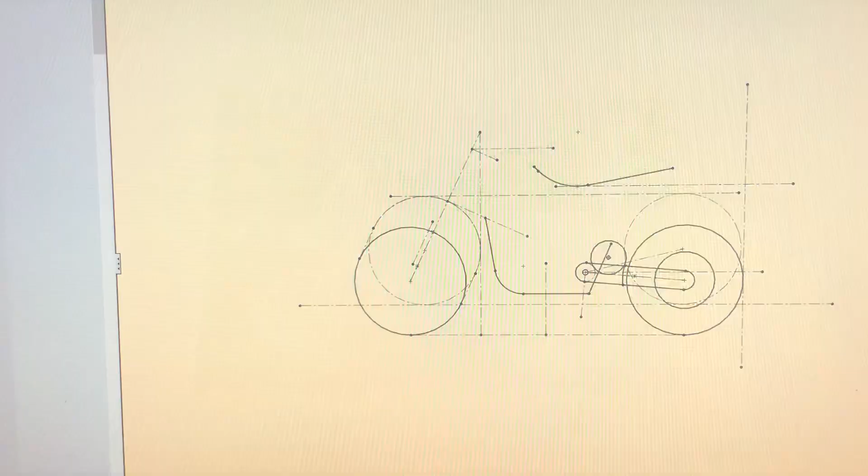So I started by drawing a life-size, 1:1 scale figure on the notepad, and by placing the figure on the motorcycle, it gave me an idea of how big it should be. So from there, I drew a sketch, inputting the dimensions.

First thing first, size of the wheel. And then from the drawing, the wheelbase. I like to give round numbers so it's not a wacky figure. So this is in inches, right?

And then the inseam, so the height when the figure sits, like the lowest part of the seat, and then a curvature. So this is the seat. So this line and this segment here, this arc, that's the seat.

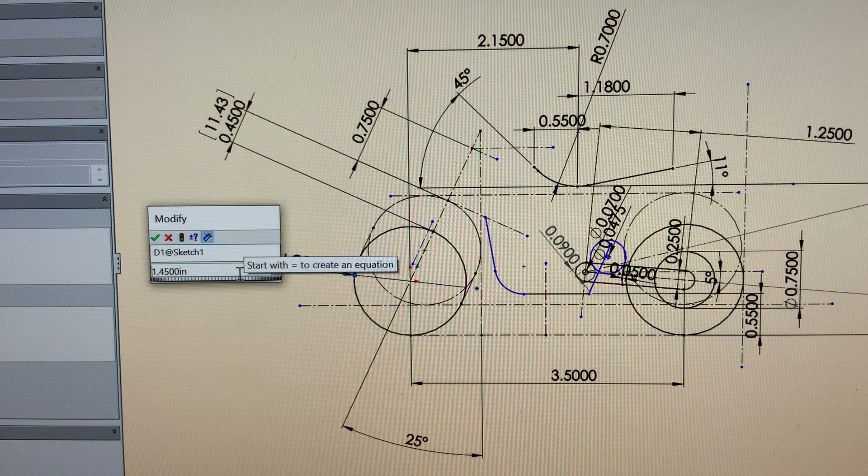And then each wheel, once I drew them, I know the size and I play around, are they going to be bigger, smaller? And then the suspension, how much travel do I give it? In real life, they have 11, 12 inches of suspension. You scale it down by 18 or by 20, depending on what you think your scale is.

Here in this case, you say, okay, 11 millimeters, that's a lot, that's plenty. And this gives me the fairing, how high the front wheel comes in. This is where the fairing is going to be. When the suspension bottoms out at the forks, everything has to be there.

And then a steering head. If the steering head is too shallow, it's not strong enough. So the longer the steering head tube, the stronger it is. So here I give a distance, and we know the bar is going to be on top of it.

And this visually gives me a good reference. You see that the top of the steering head is nicely above the seat, so we know the bar is going to be there. It gives us very good dirt bike proportions.

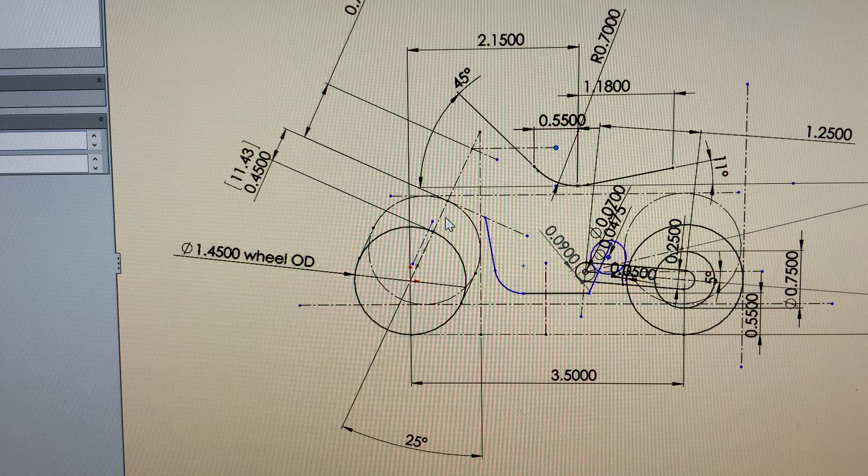Then we look at the front, the bottom tubes, where the engine cradle is. Look at the ground clearance and the clearance from the front wheel when it's fully collapsed, and also the rake, like the caster angle of the motorcycle, what do we give it.

And then same with the rear. Where's the pivot of the rear suspension? Length of the swing arm, the angle, and then the arc it travels when it bottoms out. You need some room so that you can build the seat and the guard.

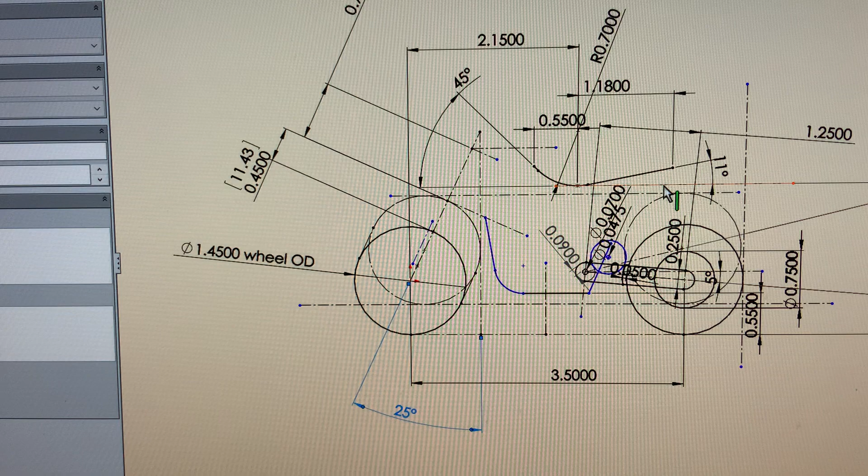So here, this is an artifact, so I was going to make the motorized version. This was a temporary spot where I was going to put a suspension with a coil spring, or linkage. I ended up not using this at all, so it's an artifact.

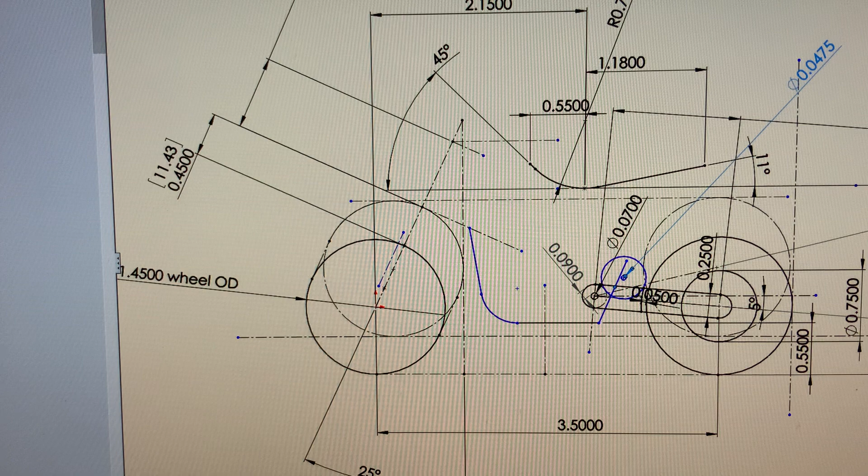Then I built the wheel. Tires, so those were measured from what the tires I had, because I didn't want to make my own tires for now. I said I'm going to use existing tires from a model.

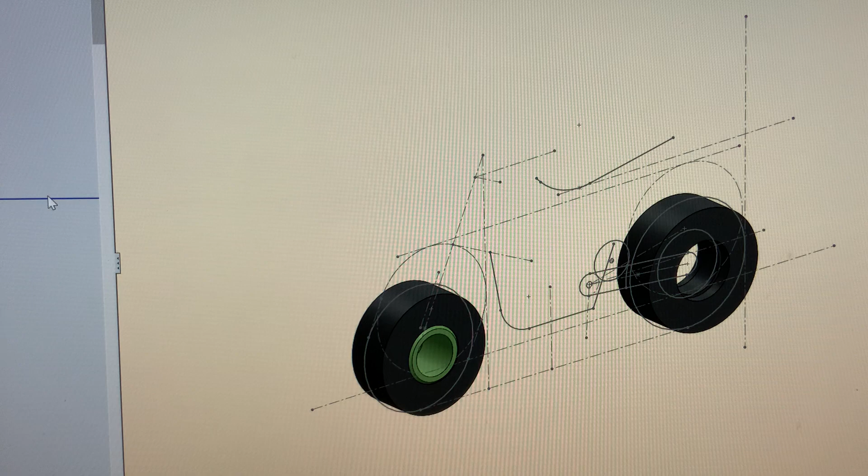Those are truck tires. So a motorcycle tire would require the tire to be round so you can steer, right? Right now it's really awkward because it's got a sharp edge. It's a square cross section.

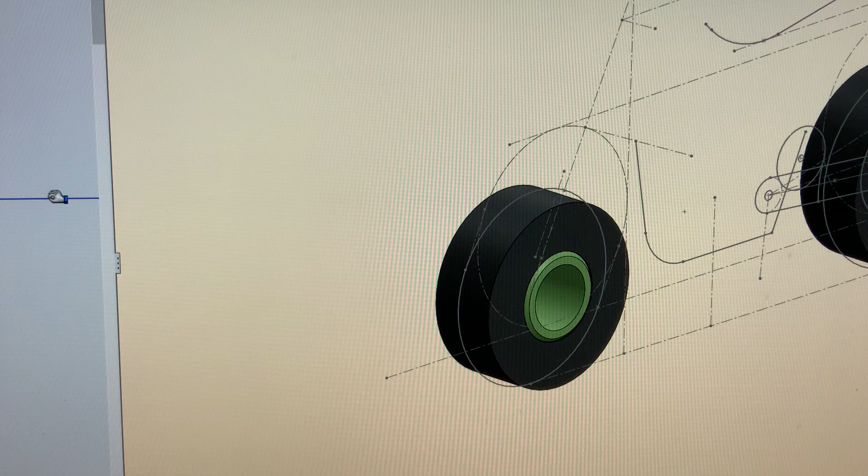But that's intended, a bit lazy, using an existing tire, but also this way the motorcycle doesn't fall off when I'm keeping it by itself. It gives a little bit of stability for just displaying it. Of course, a real bike, you have to modify it, but that's another story.

And then these are the basic bodies, the brick, base from the outline, right? So it's inspiration from the Dakar bikes from Honda's in the 80s, the NXR 750.

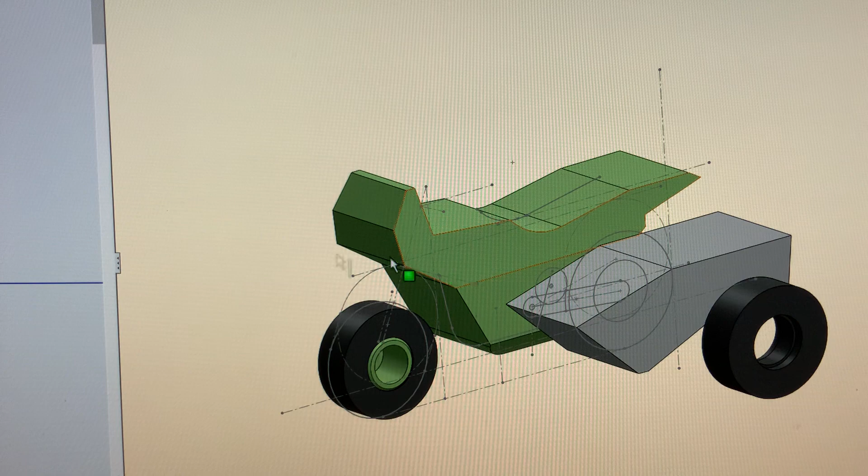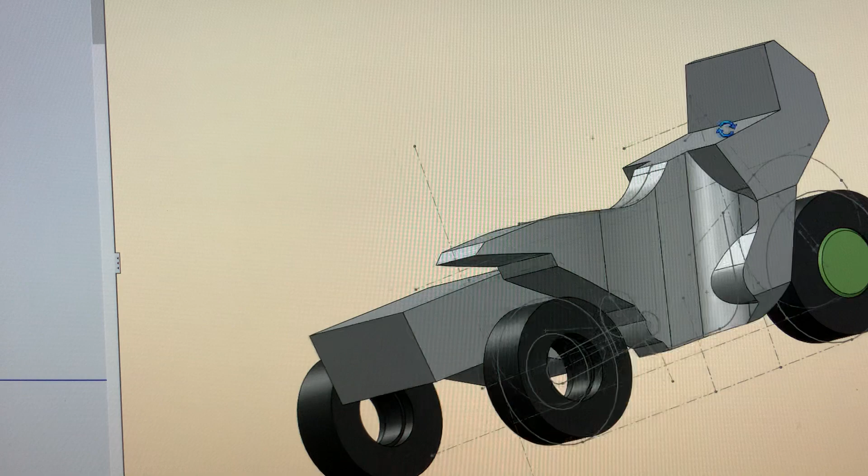And then I slim it down. I try to visualize the knees going around and the feet. The goal here is to create a body as big as possible so I can house the electronics, the motor, the batteries, all the stuff I want to put inside.

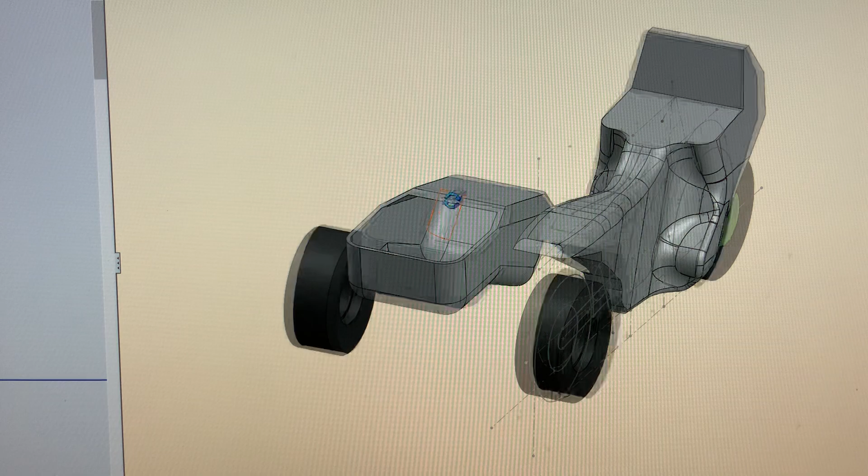So I'm going to make a shape that is as bulky as possible while being realistic, while allowing the figure to sit on. Then I play with all the fillets, round things up, round things up, round things up.

So the rear is not realistic. The rear is more like dirt bike. I didn't do the tanks and whatnot, because this is still a study, so I want to be a bit lazy and move a little faster.

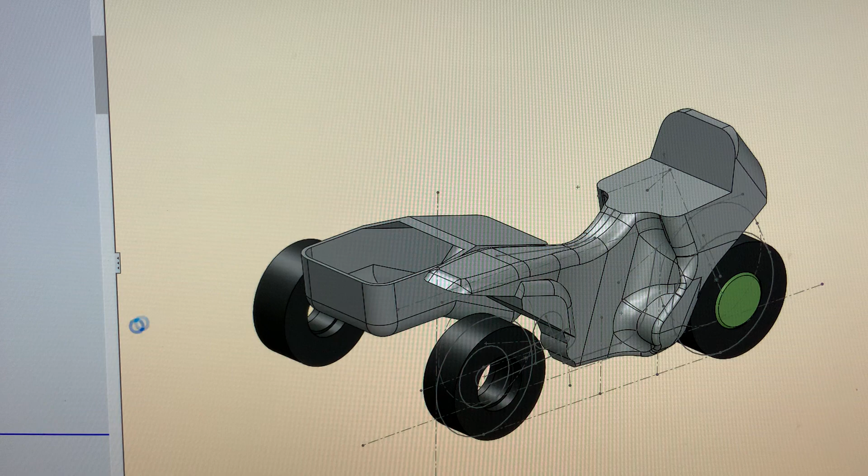Then here it starts to look decent. Like, okay, I'm gonna have the headlights there, the instrument panel in there. Okay.

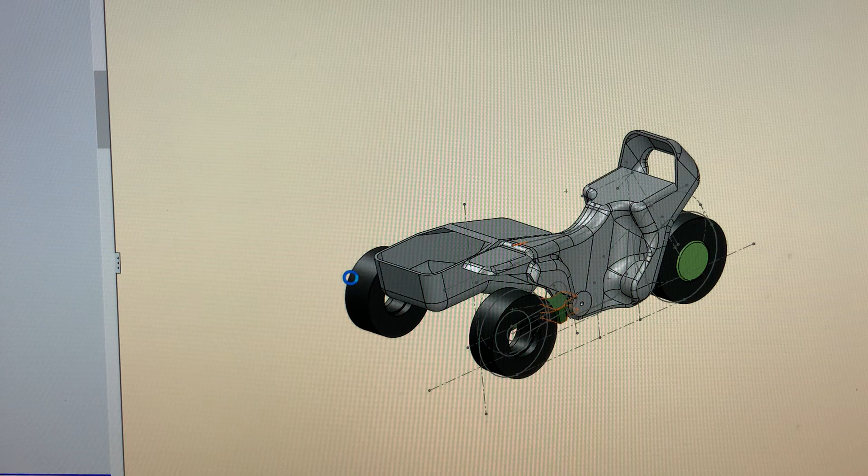Moving forward, I cut the seat. Looks good, looks realistic. Place the headlights. Okay, steering.

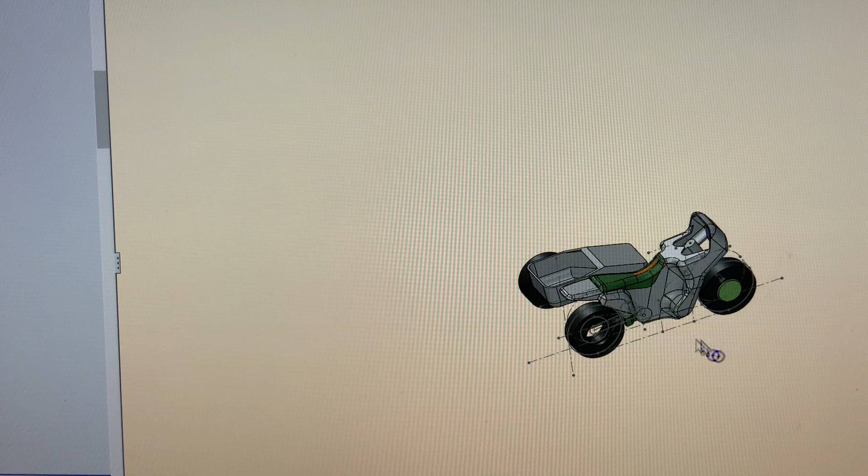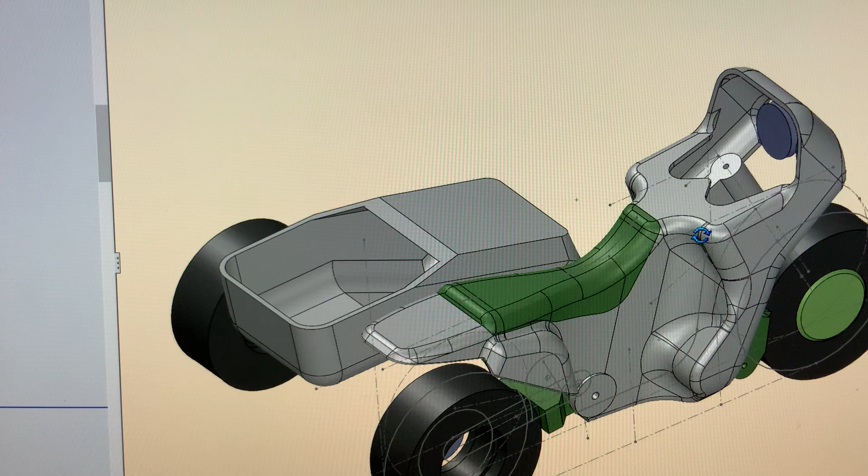The head tube has been made. And at this stage I realized, well, the real bike I would need to make a chassis and everything, and the body has to fit on the chassis. I would have to cut holes for ventilation where the radiators are, put the engine in, and cut. It's a lot of work. It can be done, but since this is a study, let's make it a monocoque, meaning the body is going to be supporting all the members, all the components, and it's just a printed prototype.

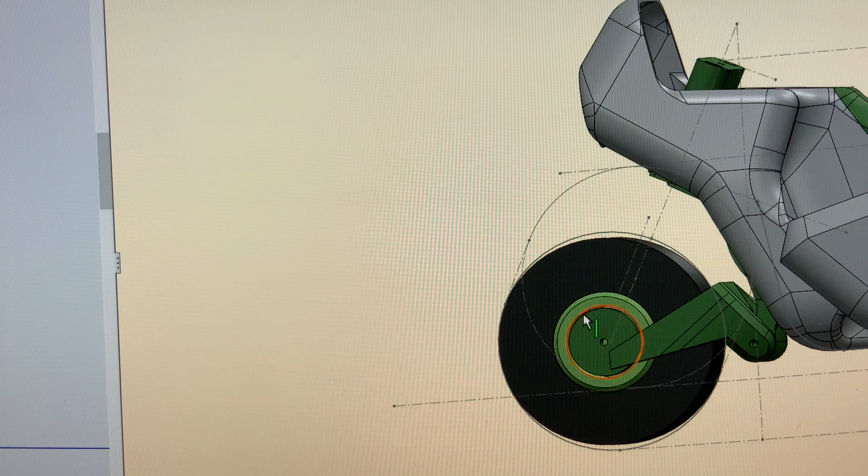So here's the forks, and this is the fork holder. I've already laid down the pivot. The pivot has to be as low as possible so that it's compliant, because if the pivot is too high, the wheel would not be able to move. So I have to lay it down and then test it.

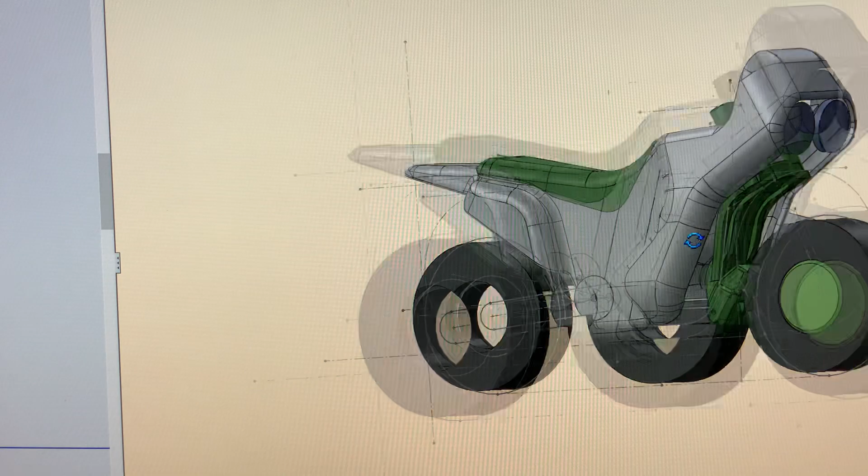So I spun the fork a few times to see the interference of the body. This gap here, in real life, is where the radiators would be. In our case, it's just to clear the fork so they can swivel without hitting anything. The only way to know that it doesn't hit anything is to turn it in the software.

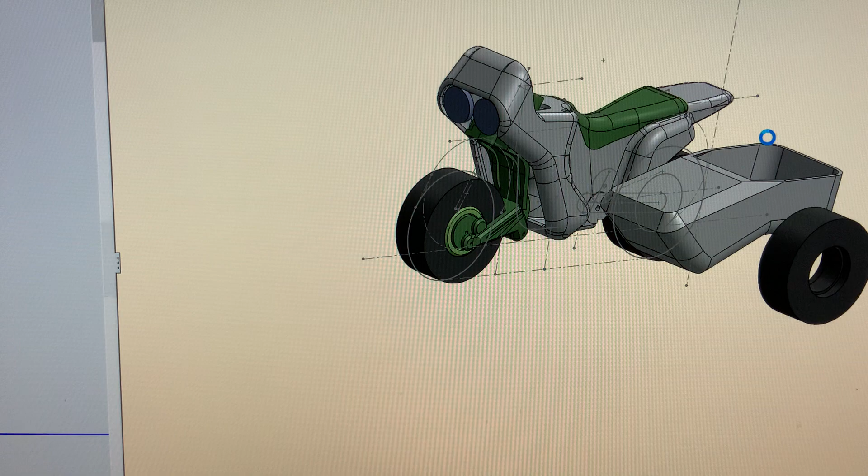I don't have it anymore, but let's see, I can keep going. That's more details - little details like the fuel caps.

These forks at this stage are very unconventional. If I wanted to at this stage, it'd be very easy to extend. Notice they were hollow, and that's because I was considering doing telescopic forks. I know it looks more conventional because this swing arm is a little odd with the blade, which has a flaw, by the way - when the suspension collapses, it does bend the other way and rubs the wheel. So, you know, it can have a few refinements. Many things can still be improved.

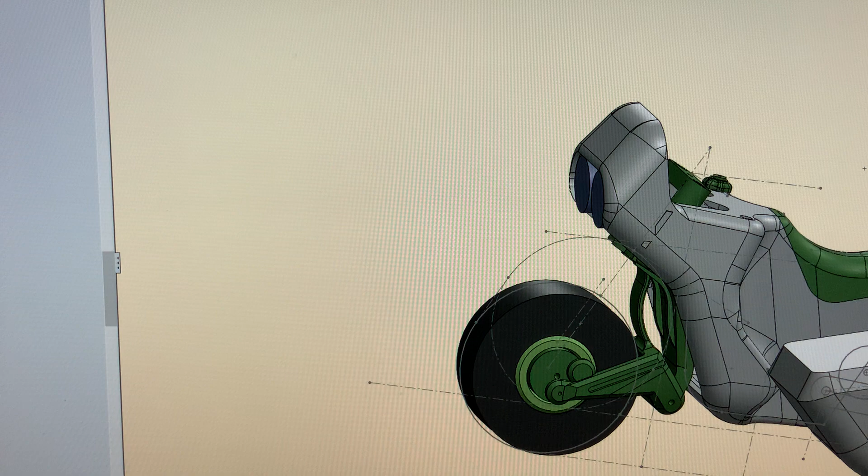Okay, and then move forward. So got the foot pegs. Let's hide the sketch so we don't see it as much. There you go.

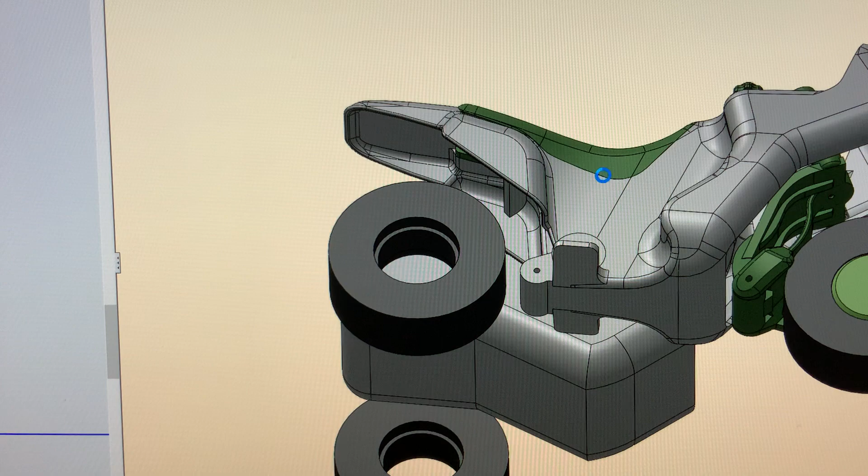So there's no screws, no glue at this stage, except maybe for the headlight dash that needs to be glued in, because I got lazy, but you can actually make everything press fit, like the seat is. So for example, let me show you here.

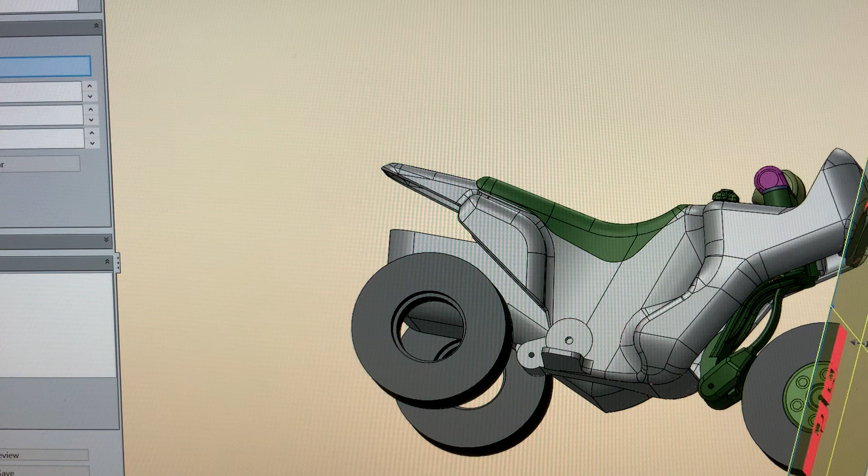So here's what's inside, right? So the seat is there. There's a rib that overlaps in there, and that little round bump here that hooks so the seat doesn't fall off.

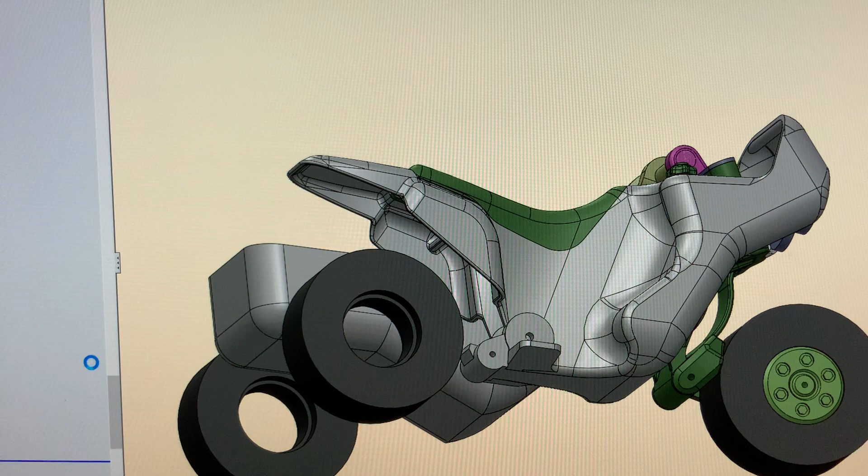So I'm not an expert. I don't do complex surfaces like real professional modelers do. I mostly carve things just like if it was wood - I extrude, I cut, I shave, I add, I round things up.

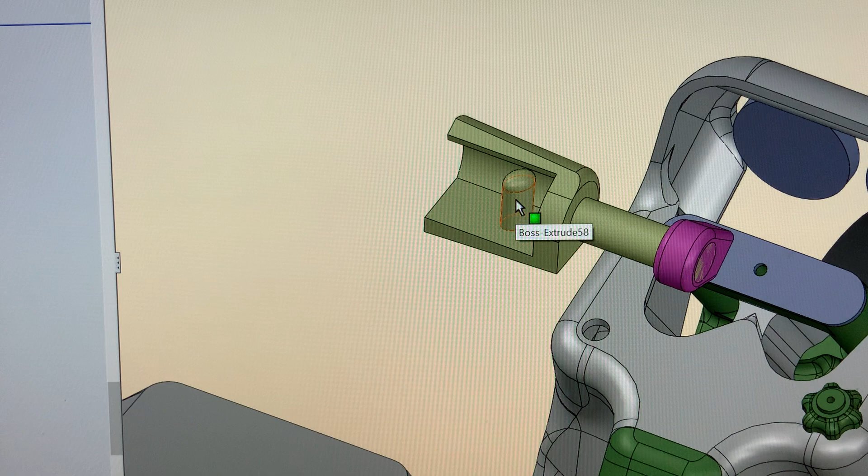Here's the handlebars design, which is - the concept is to not have the figure rotating their hands, because the wrists don't rotate. And even if they did, when someone's on a motorcycle, it's not just the wrist rotating, there's also some compound angles that a toy figure does not really have well.

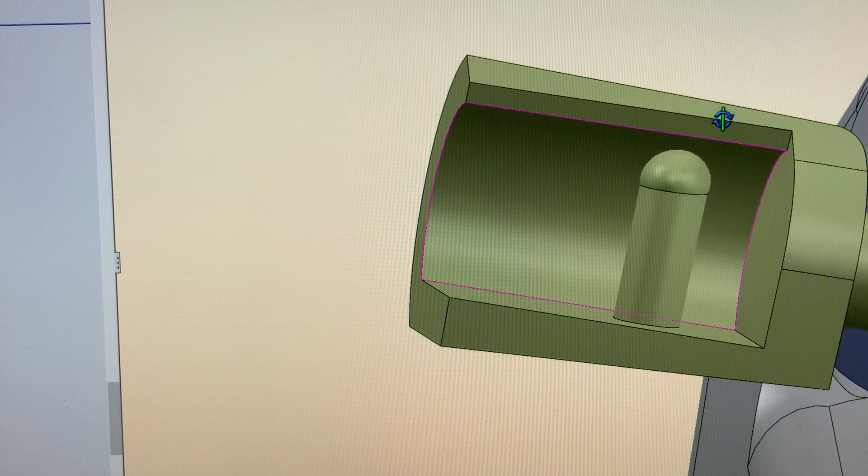So here, the idea is to have a grip that's vertical, but the thumb is going to go past over center and the fingertips going to go past. The idea is not to have this grip inside the hand at all times, but to pinch. Here, I'm going to show you - there you go. To pinch between the upper edge of the guard and the top of the grip, so that the thumb and fingertips go past and then they're held there.

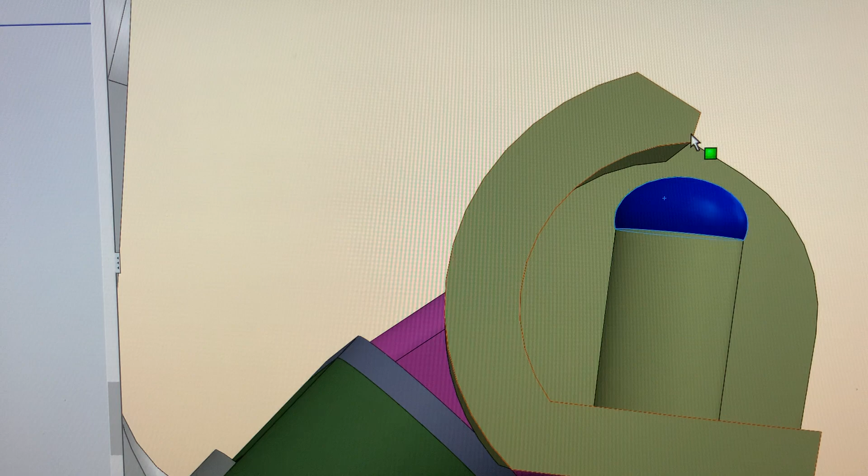Then the hand is resting on top, but does not need to be on it. And by the way, it would have to be the other hand for the left hand - this is for the left hand. So...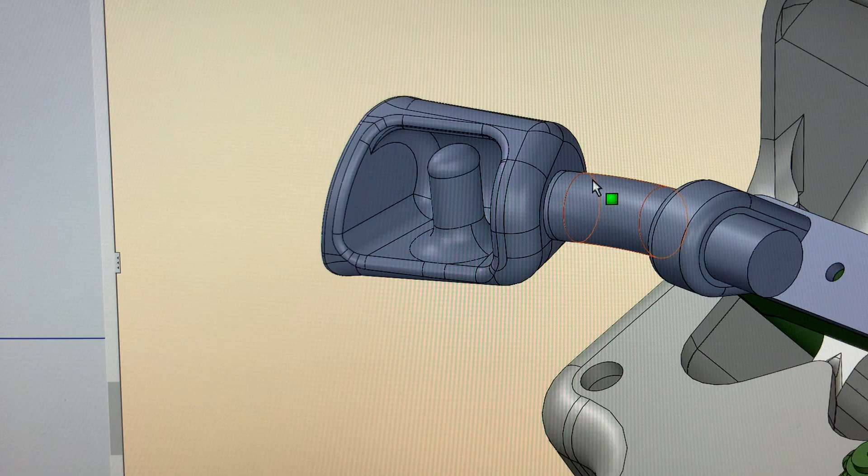I don't know where it's like - so when I make stuff, I make it and then I move it around a lot. It's not an advanced technique because people say you're supposed to know where you're going, but I don't. I'm figuring out things as I make it. So as I model it, I look at it, and it's really by eye. I'm judging and making adjustments, refining it.

So here the bars are good, I mirror them. Okay.

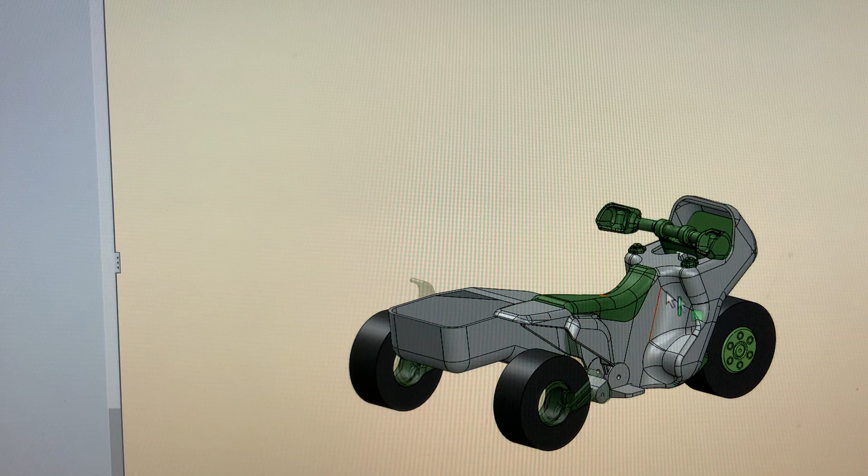And then I got lazy. I grabbed my Warthog headlights and brought them in.

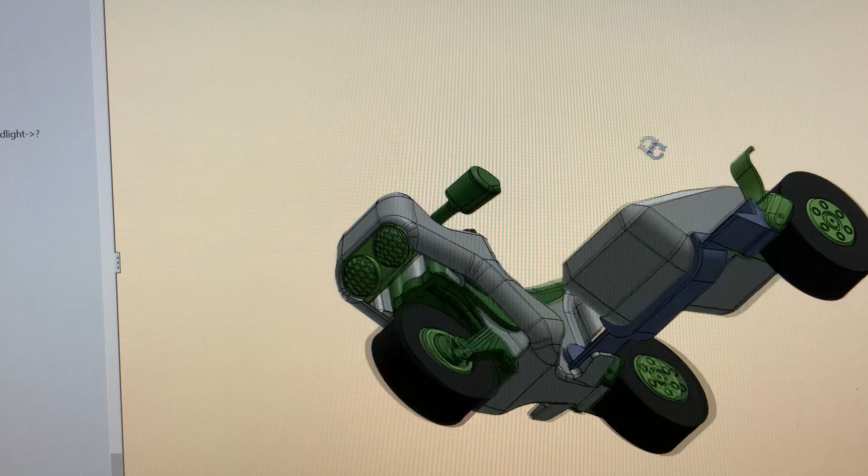So at this stage, there's a brace. I got lazy, this brace is minimal, it's ugly, but it's just to get the video down, to have something holding it. I didn't want to spend too much time because I don't think I'm that much of a fan of sidecars, so I said good enough.

And you'll notice I used the same swing arm from the rear. I had an exact copy there.

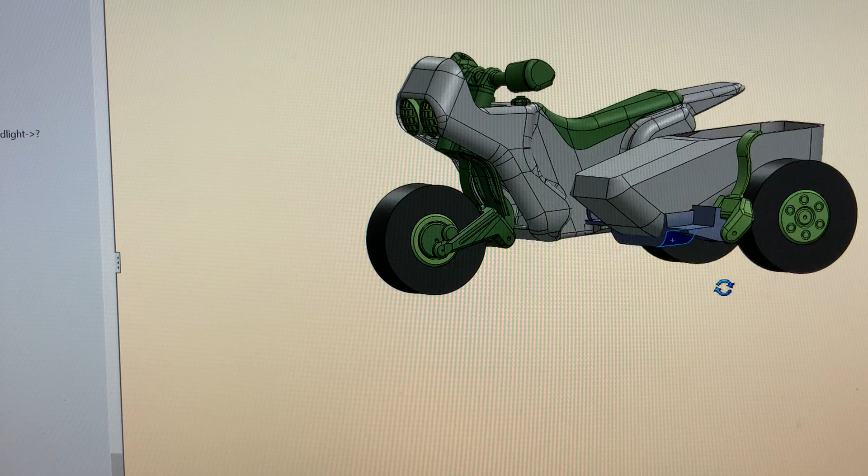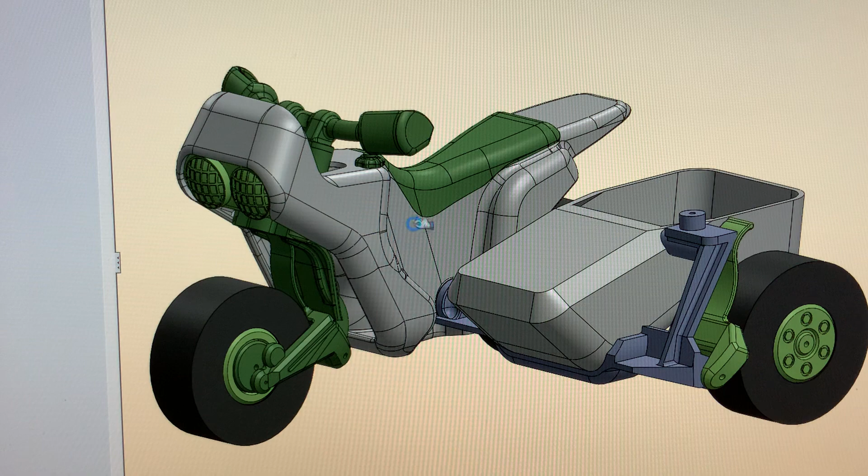And yeah, there we have it. So now let's see if I have... there you go. So here, like rotating the bar, this is rotating them a little bit, but let's see if I rotate them all the way.

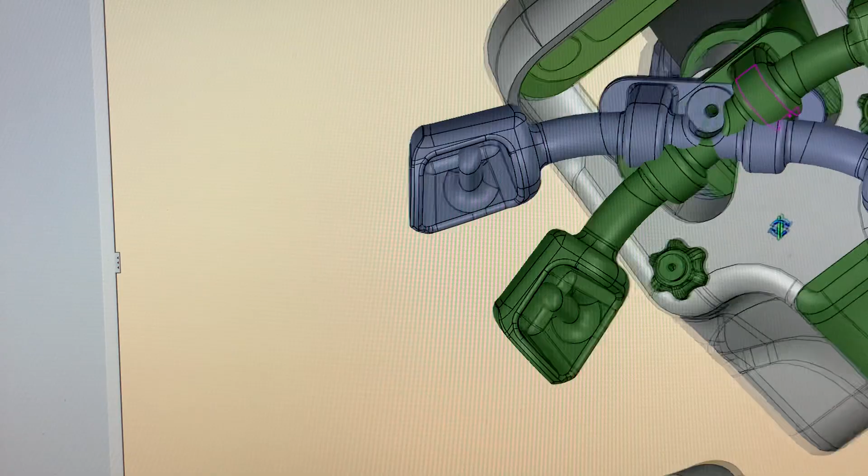There you go. So in gray you can see the bars at full lock, to see what's the interference in the chassis. Another issue I had was the interference of the gas caps, because initially they were hitting it, so I had to resculpt the body.

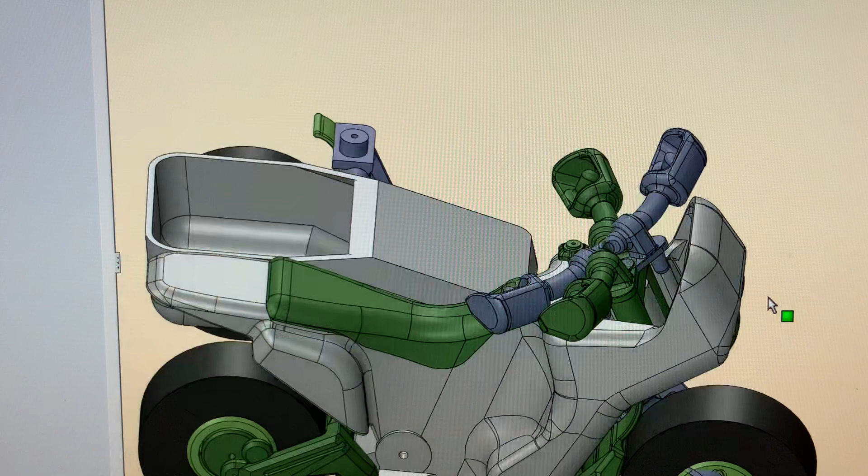The bars were in a decent position, but there was some interference. And then same with the dash here, this edge was touching. So it's like, well, form follows function, right? So the form had to be adjusted so that the bars could have a full lock.

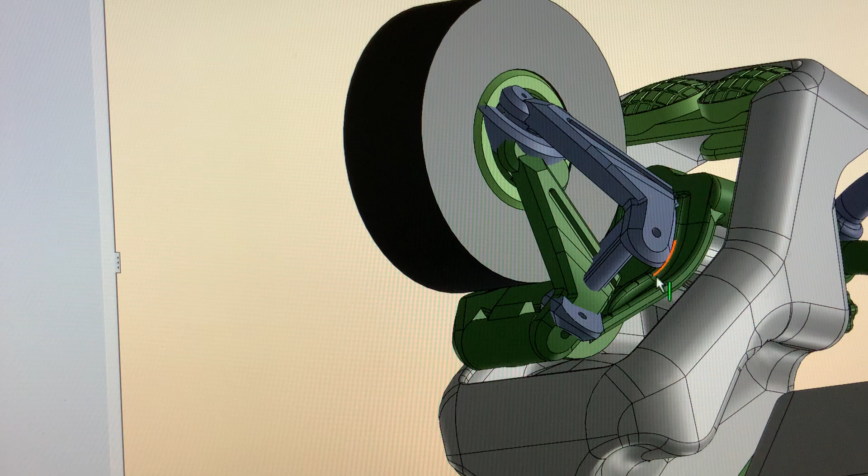And then here on the swing arm, I had to see, okay, what does it look like when it turns? Obviously it's missing a component, but I turned the entire fork to make sure there was no interference.

Now this is not critical. I mean, if we play with Joes, we might not need a full lock. We might be okay with just a little bit of wiggle.

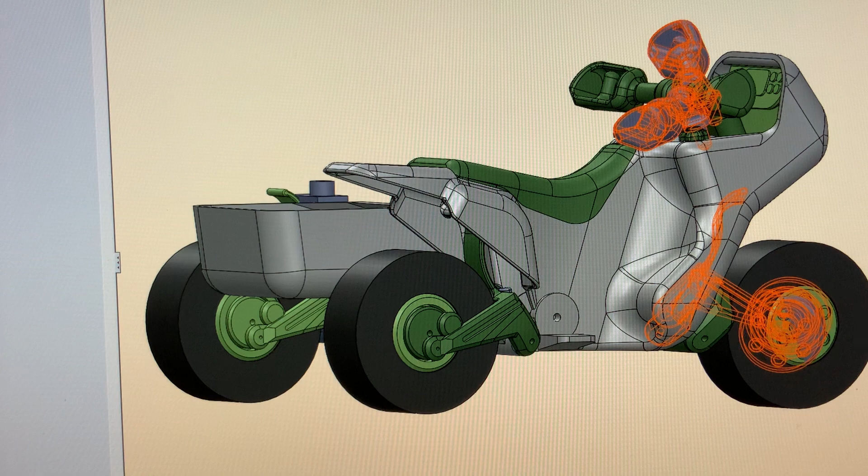Okay, so here it is. I'm going to go back. So to explain, as a kid, I never had this toy. I was never into motorcycles at the time.

I wanted to acquire one now because I was looking for a new project, and my friends, all my friends who collect, told me don't get one. It's fragile, it's very hard to get with all the parts, it doesn't play well. So I got nothing but criticism from people who had it.

Then I looked at all the vintage 80s Tamiya catalog, and I was trying to find what did they use, because a lot of the details of the Joe vehicles are not something they created from scratch. They kit bashed some existing toys that they had. So I think I found it.

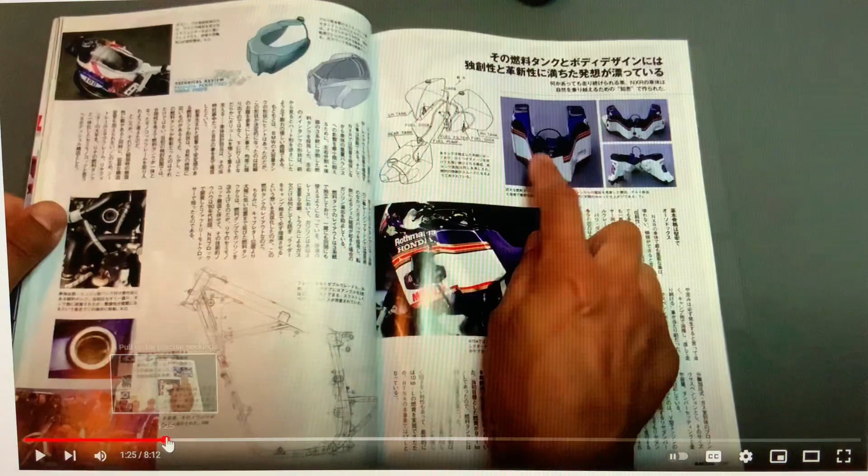But they took a street bike. I'm not interested in street bikes. And for what the Joes do with it in the cartoon, it looks like they might need something more off-road. So a Dakar bike makes more sense, and the very big body enables me to stuff all the electronics and everything I want to put in it. Then also, here you can see my inspiration for why I had dual tanks to justify it.

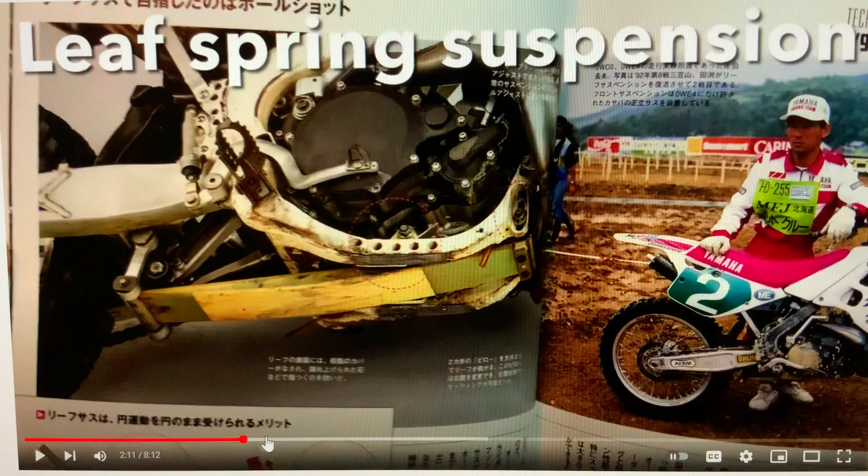Then I looked at modern motorcycles, but it doesn't fit because it's for Joe. Leaf spring - this is something that, like I said, I could have put small springs in it, but I'm lazy, I'm going to use this flexing thing. And then the other is the leading front suspension, because I don't want to do forks because of the issues of making telescopic forks at such a small scale.

So I don't have pictures of it, but the Bimota is the example of the single-sided front swing arm that's on a motorcycle. Bimota, it's called. So that's what I was looking at.

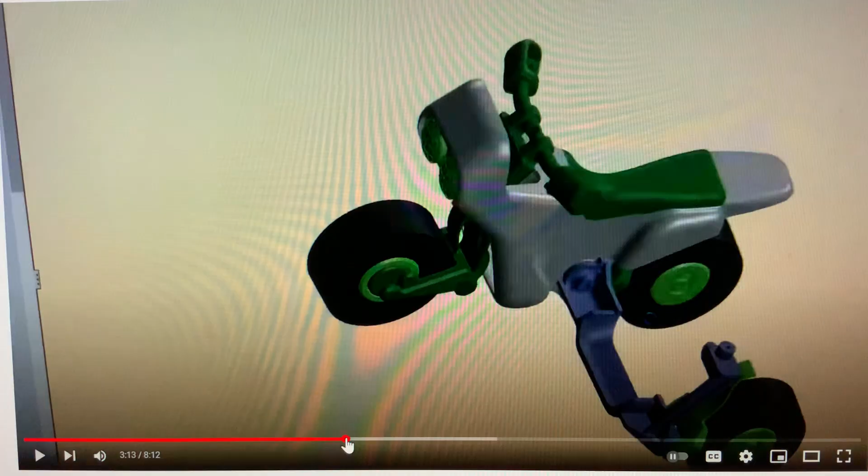So I did a study with what I had, and it was bulky, so I figured it would need a much bigger swing arm to house the gears and the bevel. So yeah, this is what you've seen from the CAD.

And then I ended up just playing around with a prototype that's easy to print, requires very little gluing or modifications. It's just some metal pins and you put it together and it's fun. Yeah, it's a good base to study and play with.

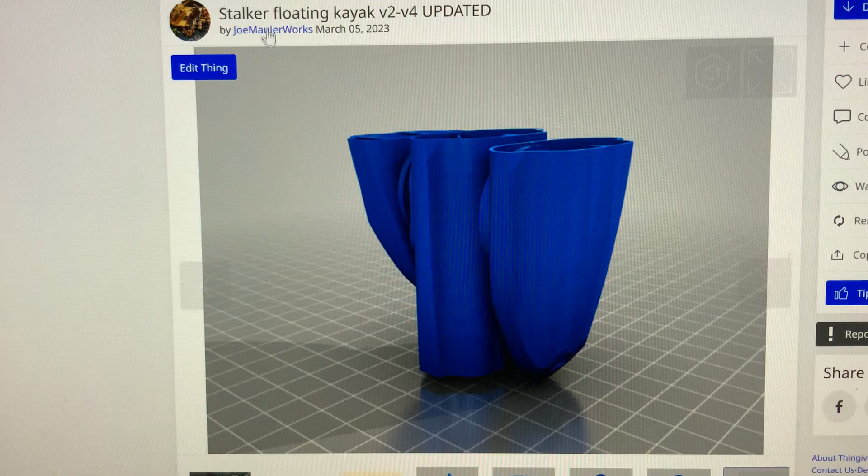So on my files, you can see that on Thingiverse, the files are there. There's two files - there's the Dreadnought version, and there's the other one. I think I did include the step files, so take the latest one by the number v4. Oh, there you go, A5, A6, there you go. I think those have been scaled down.

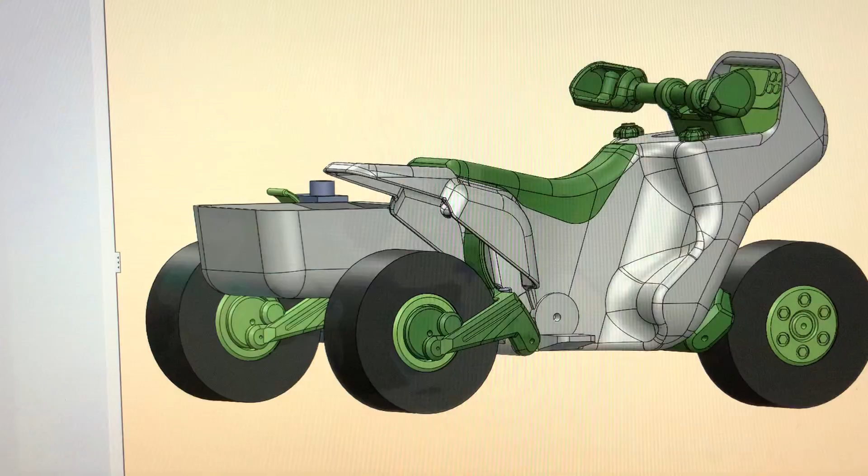So one thing to notice is I designed the motorcycle and then I scaled it down to make it smaller because it felt like it was too big and too tall for the Joes. So when I scaled it down, I forgot by how much. Oh yeah, there it is.

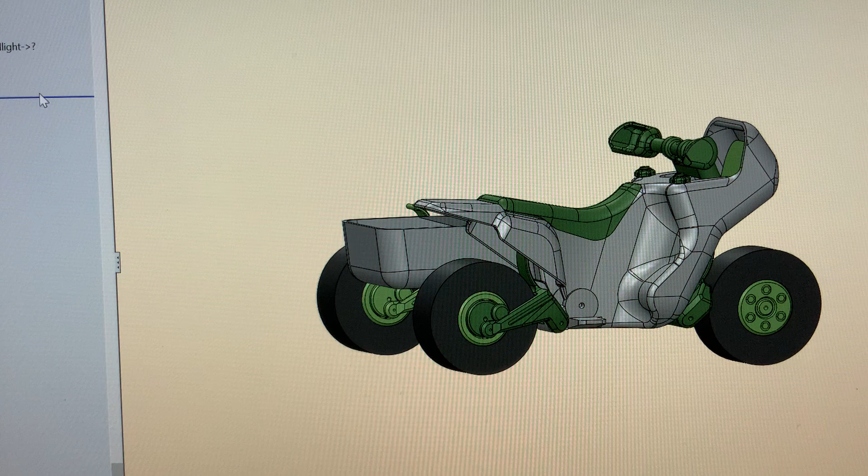So this is scaled here. Okay, I'm going to go back and scale it. It's not verified, but I did scale it by a factor of 75%, so it would be smaller and the figure could sit on it. But when I scaled it, I only scaled the body and the seat.

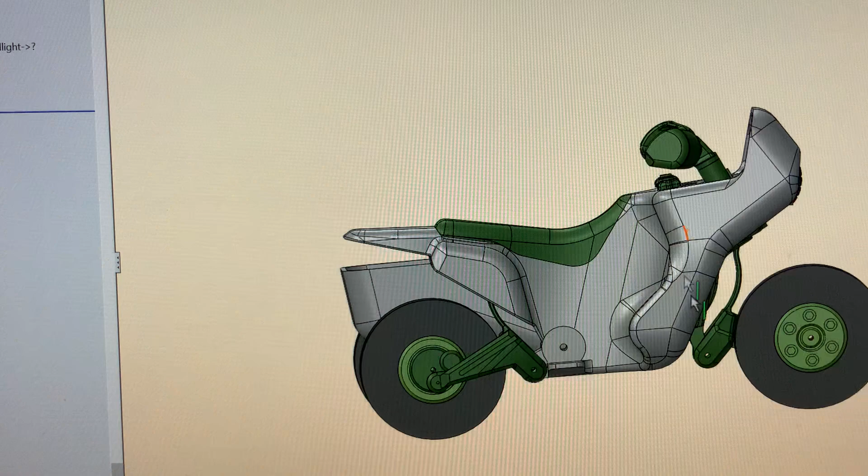I did not scale the suspension. So the full-size motorcycle has a suspension, the fork that can steer all the way. When the body is scaled down at 75%, it cannot steer anymore - it gets stuck in between by the shroud.

Now, if you use the naked Dreadnought version, that one has no issue because it is cut. Where are we here? There you go, this one - the body's cut so the fork can steer. But yeah, so the Dreadnought version is a scaled down 75% of the original version.

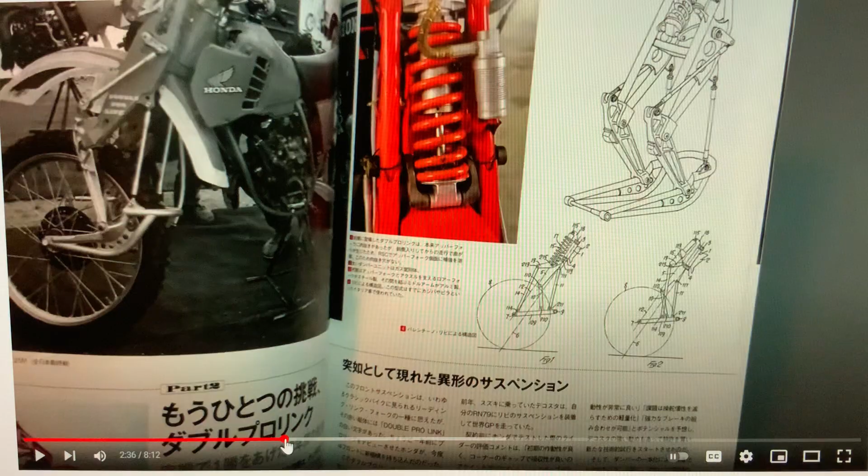You know, the moment of truth is when you need to have the prototype in your hands, because from a sketch, from a CAD model, until you have it in your hands, you don't know how strong, how small, how big it is. So this is the beauty of 3D printing - we can mock things up.

Yeah, in the old days, that's what we used to do - take foam, cardboard, or whatnot, and mock it up to see how big it is, or what the issue is with how you handle it, because everything looks swell on paper or on the screen, but then what is it like in real life?